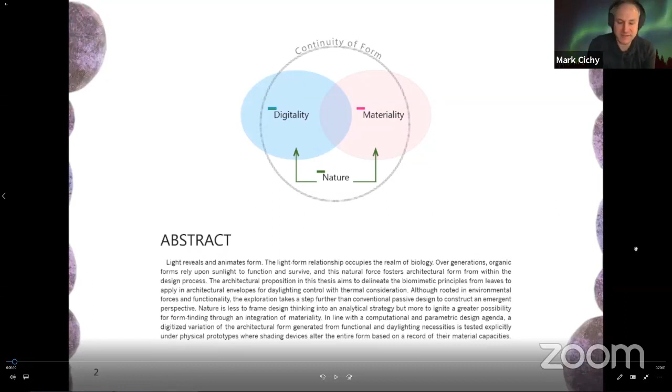Yeah, so we have David Correa, Mark Cichy, which I've not met, so hi. And so I just want to start by welcoming all of you and giving up your time. And I'm representing Marco in the department, but he's here, so he can say hi to the rest of you. We have two guests. I do not know Mark at all, so I'm really sorry. If you do not mind introducing yourself to the rest of the world. I'm sure we have a global audience spanning time zones. Sure. Mark Cichy from HOK Architects here in Toronto. I'm the global director of design technology. Excellent, thank you.

And David, I believe you are a Ryerson graduate. Yes, I am. And you, I believe, are teaching at Carleton University? No, I teach at Waterloo. So Waterloo, nearby, sorry. Yes. And I have a small office in LL Lab in Shanghai. Okay. When it's outside of Ryerson, it's the rest of the world, so it might as well be Timbuktu. Anyway, do you care introducing yourself? Myself, yeah. I went to Ryerson, had a fantastic time, great instructors, and I kind of started traveling the world. I studied in Calgary, the Yukon territories, and then in Germany for over 5 years. My expertise is in robotic fabrication and advanced materials, looking at shape-changing materials and complex composites. And now I'm teaching at Waterloo, leading the advanced fabrication and robotics area of research.

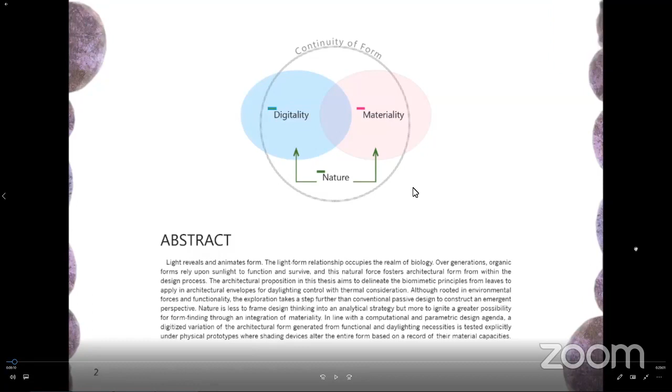Okay, you can go. Light reveals and animates form. The light-form relationship occupied the realm of biology. Over generations, organic forms rely upon sunlight to function and survive. And this natural force fosters architectural form within the design process. The architectural proposition in this thesis aims to delineate the biomimetic principle from leaves to apply to architectural envelopes for daylighting control with thermal consideration. Although rooted in environmental forces and functionality, the exploration takes a step further than conventional passive design to construct an emergent perspective,

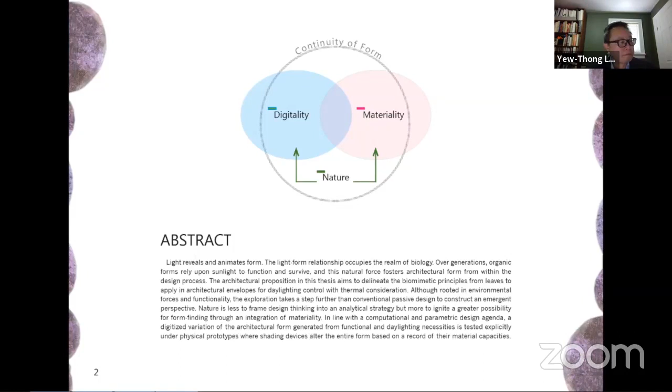a return to functionality. In the chaotic world of matter and energy, architectural form evolves actively and autonomously through forces in their elemental composition. Fundamentally, the forces or the information hidden behind the form variation originate from the functionality that it carries. This sheds light upon biomimetic design, where the organic form alters and adapts based on the functional inquiries towards survival and evolutionary essence. On Gottfried Semper's proposition about the mathematical function of architecture, forces request the change of forms. Every work of art is a result, or using a mathematical term, it is a function of an indefinite number of quantities or powers, which are the variable coefficients of the embodiment of it.

Forces in the architectural form were once equated to the iatromechanical system, coined by Descartes, which accommodates a series of discrete parts functioning as organs and bodily systems according to purely mechanical principles. The problem is the form invented from the predetermined expectation and misapprehension of natural forces will eventually direct architecture to utilitarian machinery.

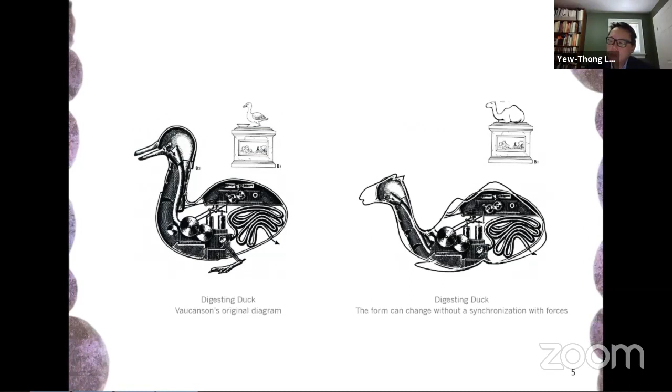Nature suggests a feedback loop in which the variation of form requests the change of its original function, resulting in a new form of function, a multifunctionality. This dialectical relationship opened a discussion toward nature where architects have found a brilliant recipe to apply in form-finding design.

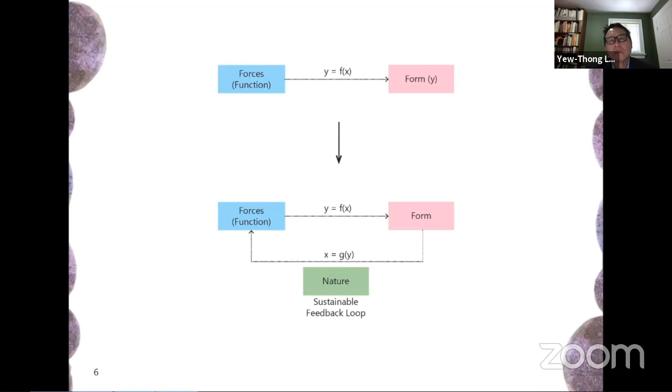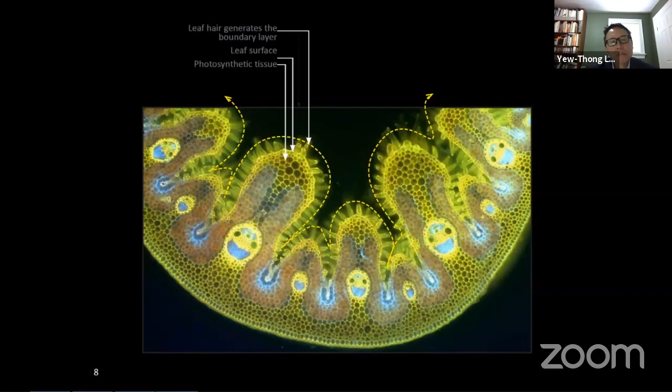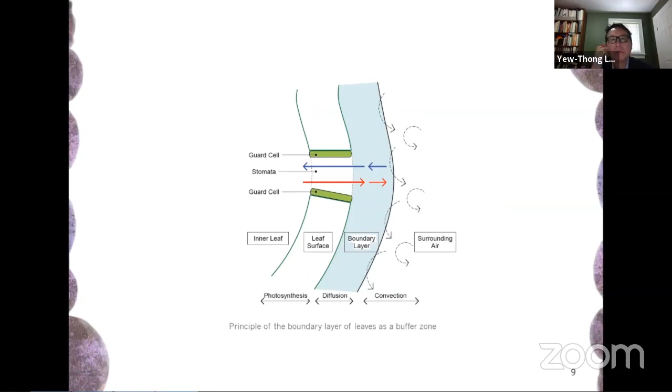Biomimetic buffer zone. Leaves are one of the most vulnerable organs of plants, with soft tissue, thin membranes, and an external location to handle photosynthesis. The leaf epidermis contains a buffer zone located just at the external boundary of the stomata layer. The boundary layer is a thin zone of calm air that surrounds each leaf. The thickness of the boundary layer influences how quickly gases and energy are exchanged between the leaf and the surrounding air.

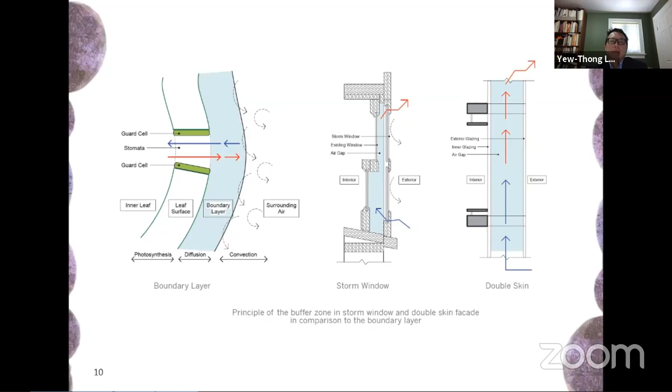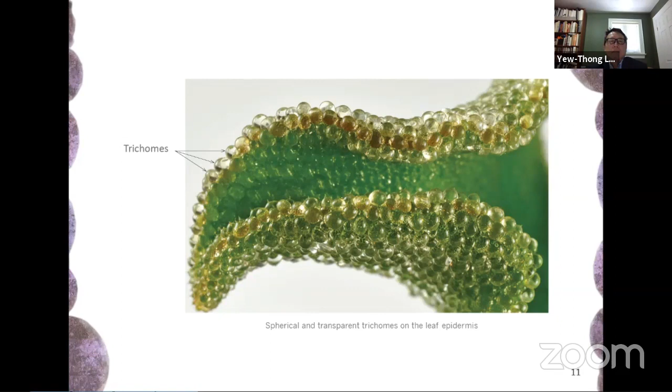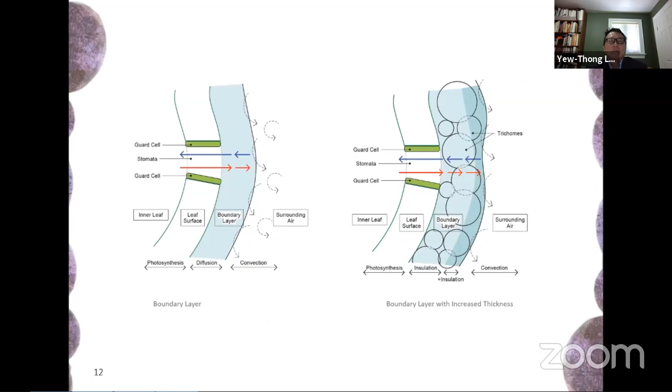Plants adjust their boundary layer thickness around leaves through the development and configuration of hair, or pubescence. The hairs, so-called trichomes, usually take spherical shapes with transparent material to form minuscule bubbles. This feature allows trichomes to maximize their air buffer zone without blocking the necessary amount of sunlight entering the photosynthetic cells beneath.

The field of architecture has stated the biomimetic functionality of air for centuries under theoretical and technical circumstances, to fully understand and transcend the application of air in pneumatic designs. At a higher level of organic development or evolution, air is no longer a basic chemical supply, but rather an integrated force.

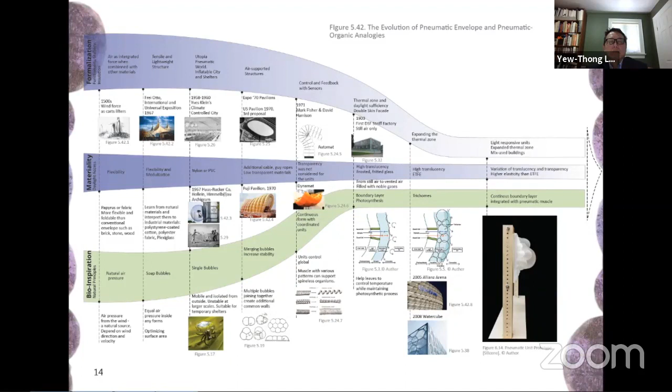In 1961, Frei Otto started to conduct experiments with soap bubbles, which can merge, keep the least enclosed surface as a cluster, and automatically construct a flat common wall between every two members. Organic cells and body parts make use of the principle to increasingly construct series of units to support each other. A single and large individual of any pneumatic form is very fragile and unstable under external pressure and easily ends up with undesirable deformations.

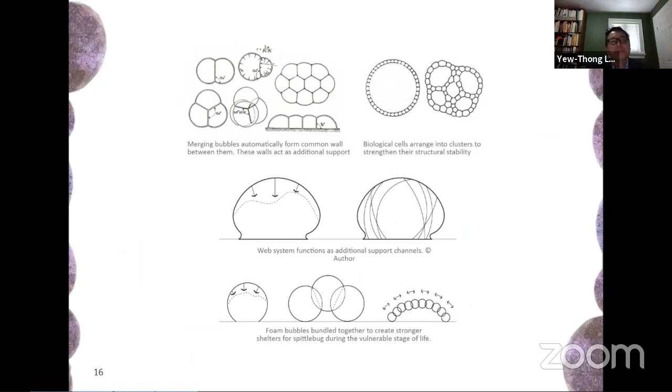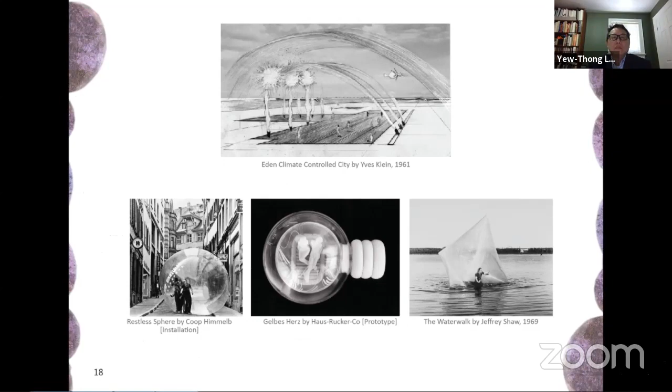However, in 1968, a group of utopian artists, theorists, and architecture students glorified air in a single unit as a magical source to construct inflated habitats for humans. In terms of material use, they were successful at containing air inside a highly transparent skin made of nylon or PVC. When functioning in buildings of a larger scale, the failure of the single pneumatic form was disclosed in the first two design options of the U.S. Pavilion for Expo 70 in Osaka in 1968.

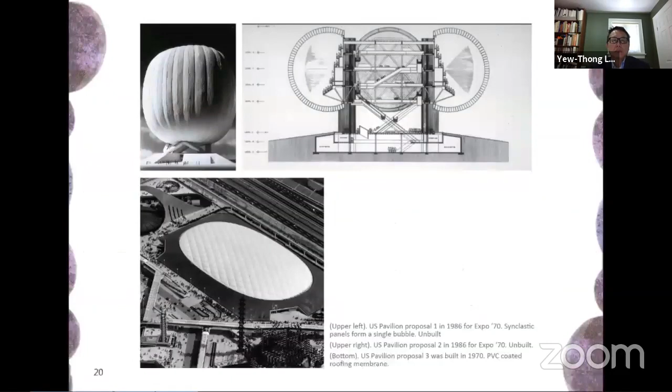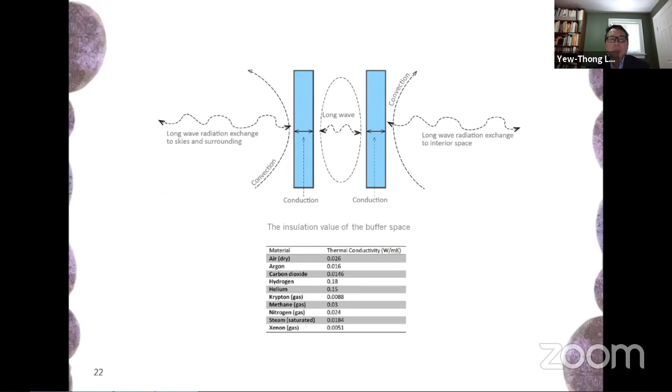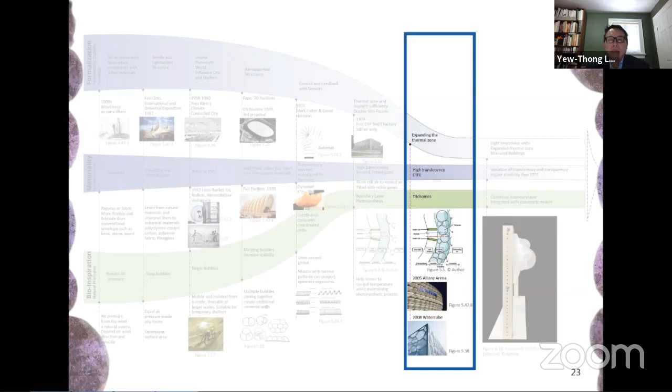Unlike massive exhibition pavilions and temporary installations, the air cavity was first used in 1903 as an insulated layer to reduce heat gain in summer and heat loss in winter for basic office space, thanks to the low thermal conductivity of air. Inspired by the more stable structural geometry of soap bubbles and the expansion of the boundary layer on leaves, the ETFE pneumatic facade became a catalyst for liberating the rigid form of the conventional double-skin facade.

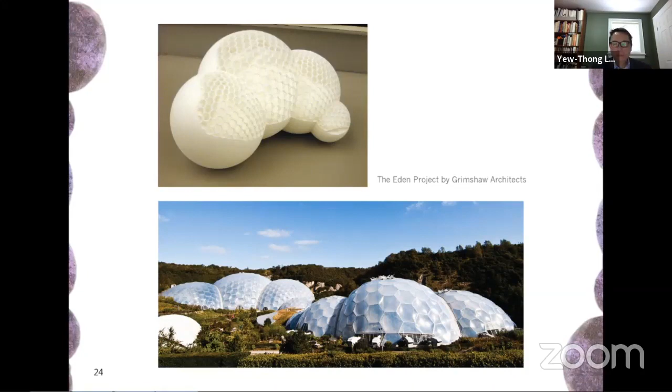The first ETFE building was the Eden Project, designed by Grimshaw Architects in 2000. After the Eden Project, many descendants of the ETFE system have been spawned over the course of 20 years as a default immediate solution for daylighting forms. However, these types of envelopes enclose merely a massive space for sport activities or exhibitions, where daylight variations are not as critical as in deep-space offices and mixed-use buildings with multiple stories.

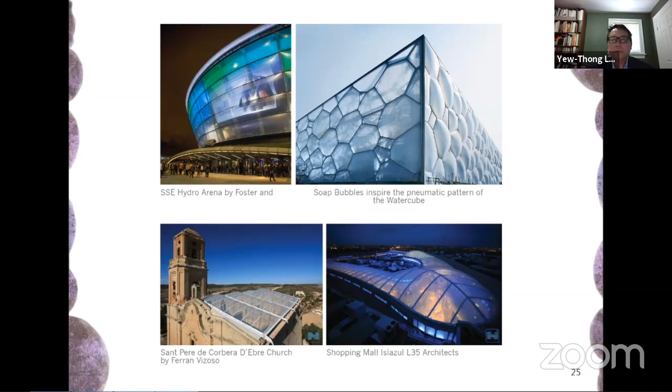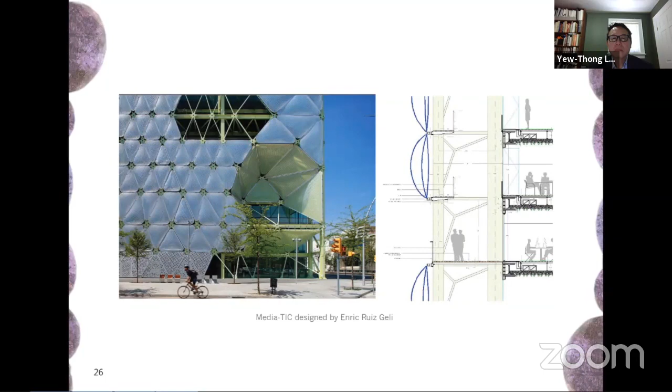In 2010, by adding more pneumatic chambers in a unit, ETFE panels in a multi-story building named Media TIC, designed by Enric Ruiz Geli, can vary their transparency across the facade area to adjust daylight access, opening a new paradigm in responsive pneumatic envelopes for daylighting design. Investigating contemporary building facades from a biomimetic point of view, the thesis attempts to integrate higher performance traits of functionality, materiality, and stability in a new multifunctional pneumatic envelope.

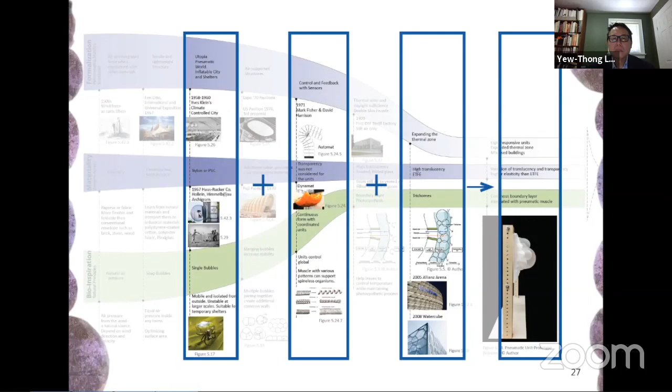Material capacities. Unlike properties, which are finite with time and space and strictly defined in measurement, a material capacity is always subtle, potential, and relational, expressing its hybrid performance with patterns of material distribution, coming closer to the responsiveness and flexibility of biological tissue. The material selected for fabricating pneumatic daylighting components must emulate similar properties to those from nature. In Oxman's article on variable property design, she claimed that designers can dynamically mix and vary the ratio of different materials in order to produce a continuous gradient.

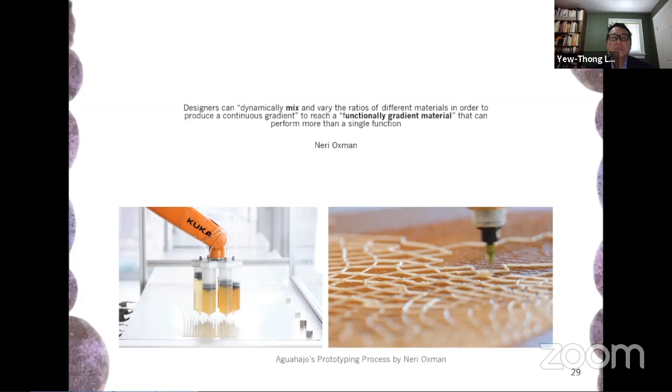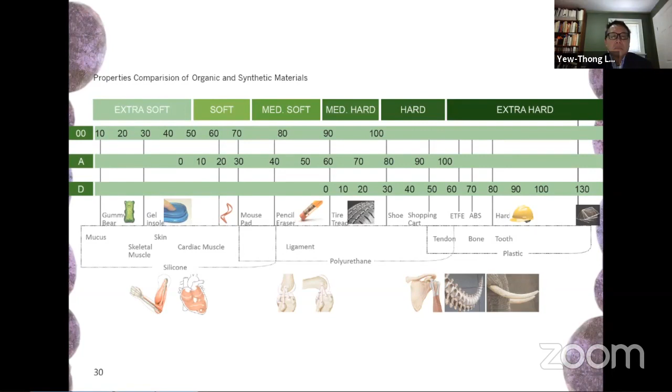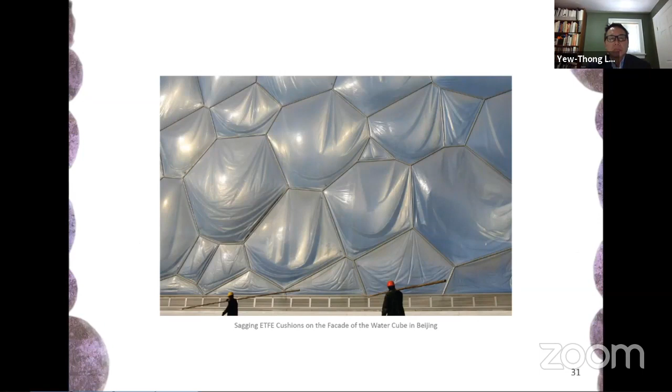Also, thanks to the liquid base, silicone rubber can occupy and copy almost every micro detail of a mold, which can be measured and digitally produced in advance via 3D printing. ETFE's lower elasticity confines the pneumatic unit to a fixed frame, and it cannot vary unless there is a change in the grid pattern. As silicone is softer, it can return to its normal state after deflation. Softness and body compliance are significant features normally apparent in biological systems, which contribute to a more natural interaction with their environment.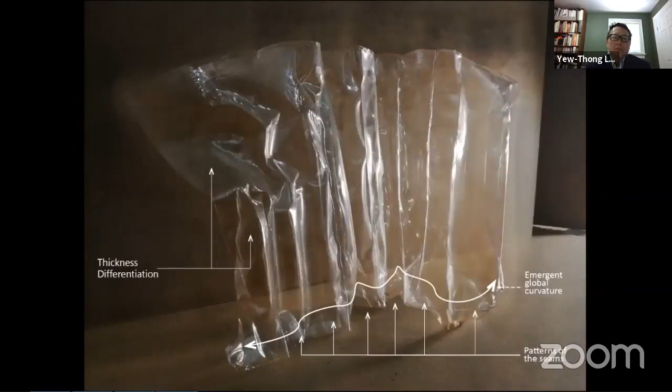The experiment with plastic sheets showcased an emergent curvature resulting from a variation of pneumatic patterns. However, by differentiating thickness and merging more than one hardness value in the casting process, a silicone panel can expand dynamically under the same intake of air pressure with the same surface pattern.

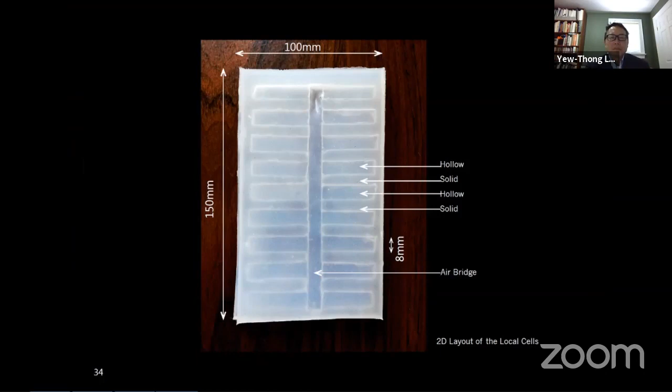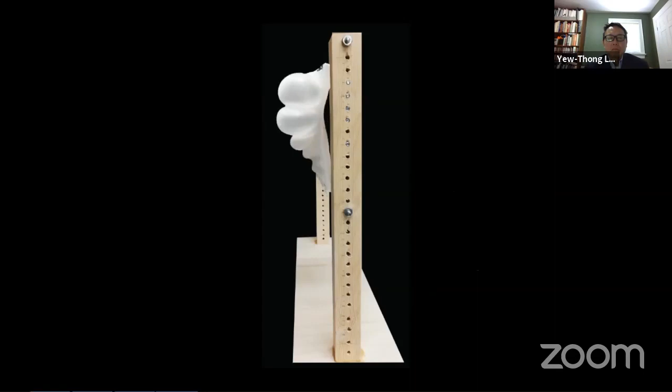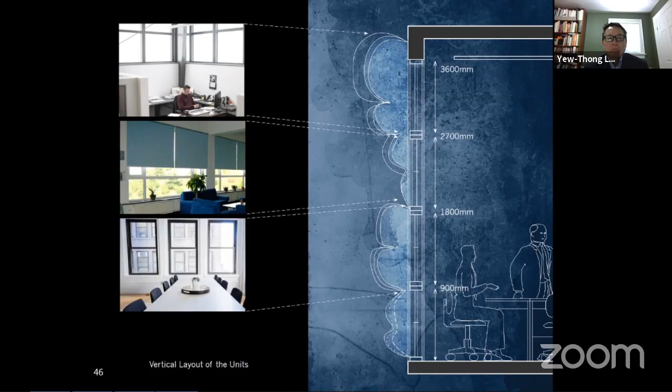On a vertical distribution, pneumatic panels unify daylighting components on an envelope, including shading devices, blinds, and windows. On a horizontal distribution, this prototype investigates the inflation level of the cells that can adjust daylight based on the sun orientation and floor plan layout.

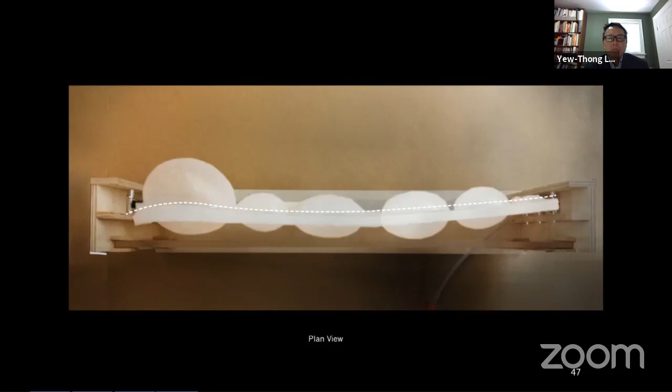To apply and validate the materiality in association with digital modeling, the design project in this thesis proposes a pneumatic facade that can control daylight and mitigate visual discomfort for a deep floor plan office building. The project is positioned in the city of Toronto, where the high living density and expense lead to packed and shadowed lots, challenging any new construction of productive working spaces.

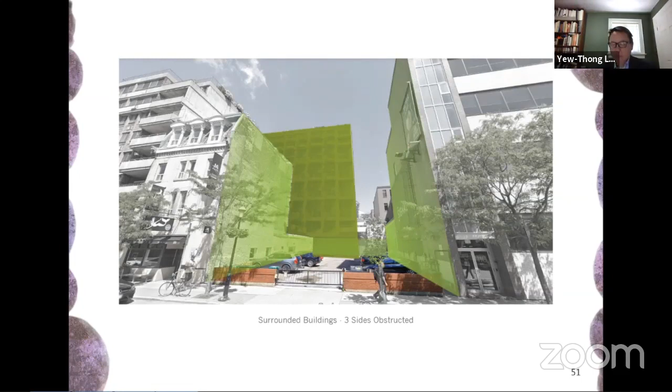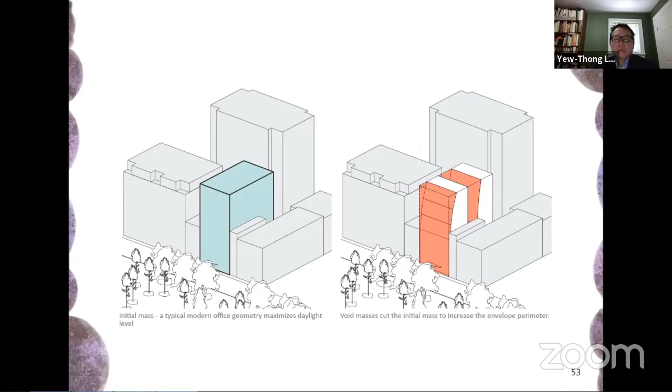The chosen site has a typical site size and only one front side that allows direct daylight access to the open area of St. James Park in the south. From a single mass, a void fillets the front to get more daylight from the south direction, and another void divides the mass into 2 parts, forming an atrium at the core. The boundary of the least daylit area drives the profile of the void that creates the atrium. The cutting profile has to be mirrored to offset the lack of daylight level therein.

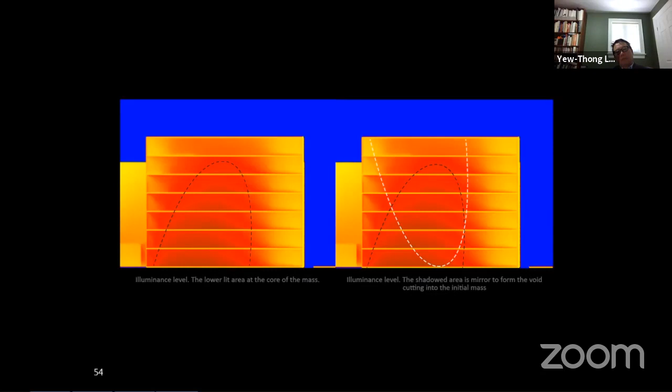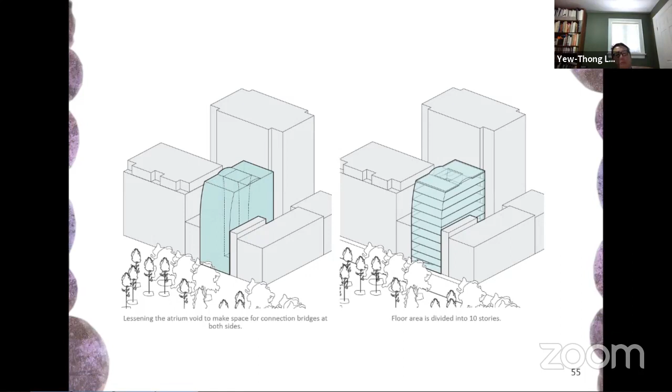During the massing process, floor area is also managed based on the other economic factors. The building model emphasizes more on the envelope for a contemporary open layout office. They seek to define a process of assessment and analysis from which to derive an aware and targeted project to get the most out of the luminous performance in interiors, aiming to achieve a threshold value of comfort.

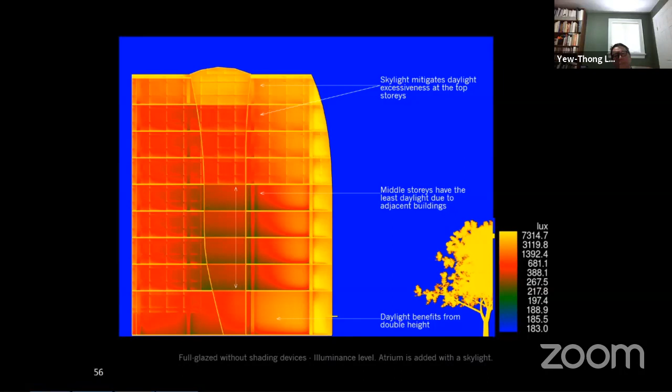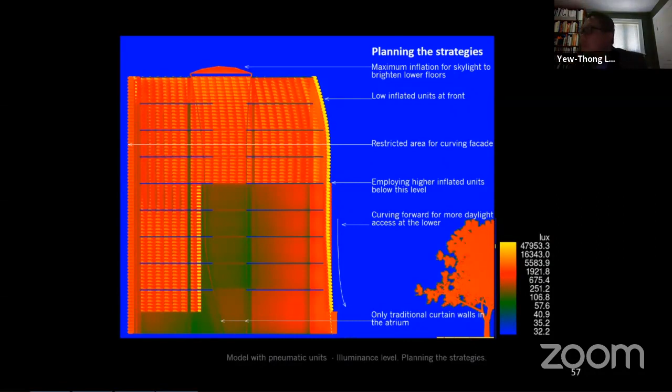There are 2 models for the illuminance analysis. The first one with fully glazed envelopes suffers from excessive sunlight on the top floor, while the atrium space above the ground level faces the problem of lack of daylight. In Model 2, a uniform pneumatic system afloat on the conventional curtain wall can diffuse the light excessiveness. However, directing daylight further to the core relies on the inflation level of each pneumatic panel in the system.

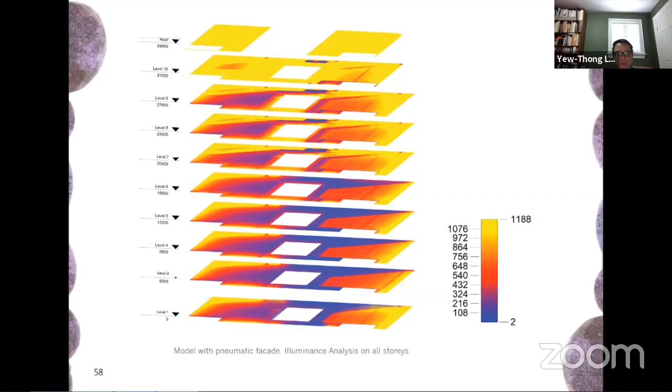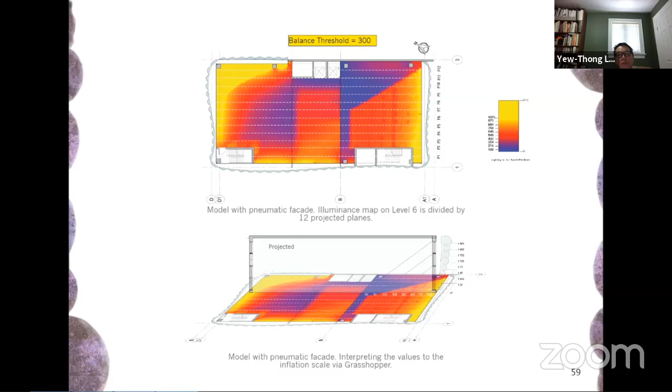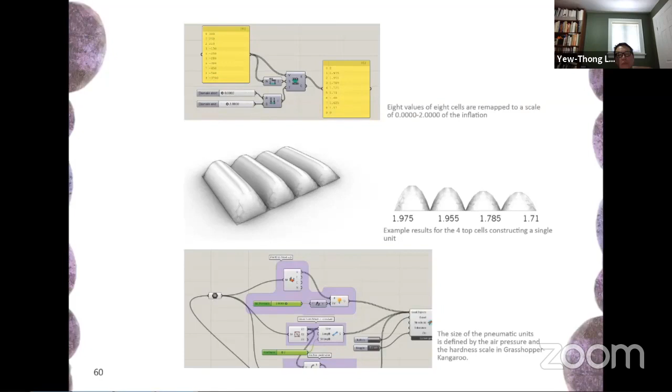The inflating dynamics of all local panels relate proportionally to the illuminance evaluation on each floor plan where the panels are installed. The illuminance map on each level is subdivided into 12 projected planes to interpret its numerical scale into the vertical distribution of pneumatic cells, with a balance threshold setting of 300 lux. By setting the variation of hardness, mimicking different types of silicone rubber, the numerical values of illuminance are remapped into the inflation factor in Grasshopper.

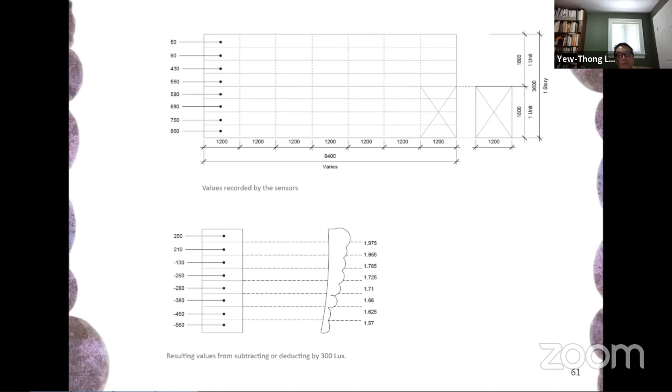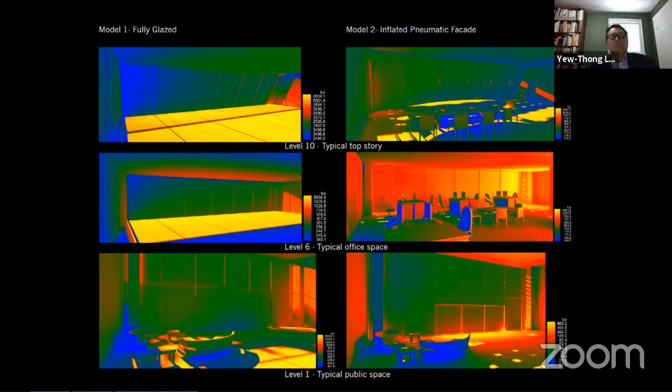The overall dimension and locality of the unit agree to the same grid-based metric, according to the commercial and industrial availability of the curtain wall panel of 4 feet by 6 feet, or 1200 mm by 1800 mm, which will be potentially convenient for the fabrication of pneumatic components in reality. In comparison to the fully glazed model, the daylight distribution in the pneumatic model is more even, maintaining comfort and productivity for the occupants.

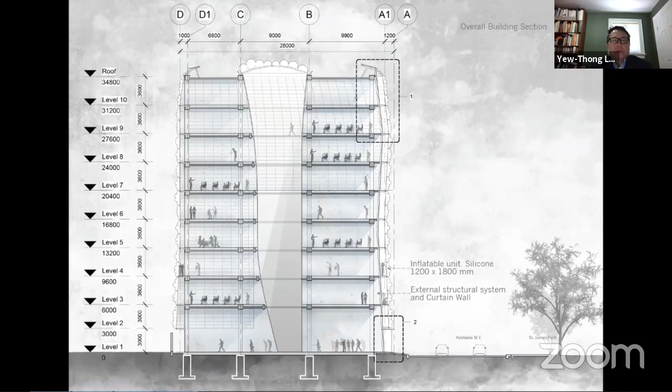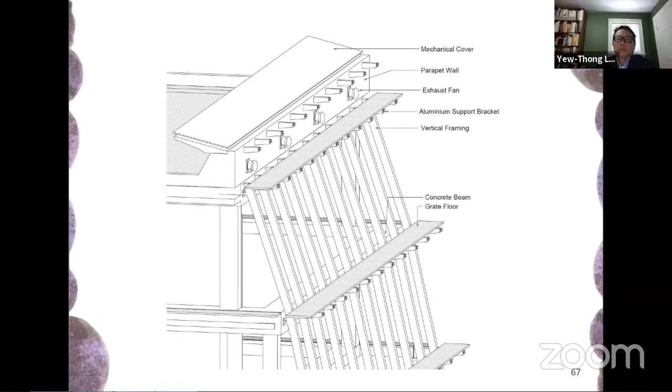Construction feasibility. The section displays the array of pneumatic panels on the south and north sides of the building. Overall, one story can hold 2 rows of pneumatic panels. When the instantaneous presence of light has been caught, it can be controlled and fixed through the self-shading and self-regulating scheme. Additional vertical framing support helps anchor the horizontal elements, including brackets, floor grate, and the curtain wall, instead of merely a maintenance shaft. The balcony opens accessibility to users. This requires an alignment of interior and grate floor level.

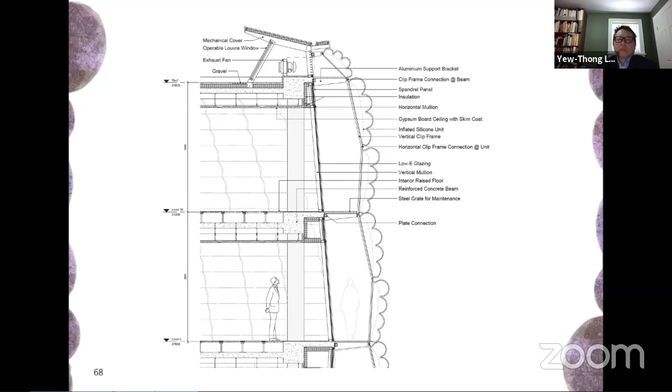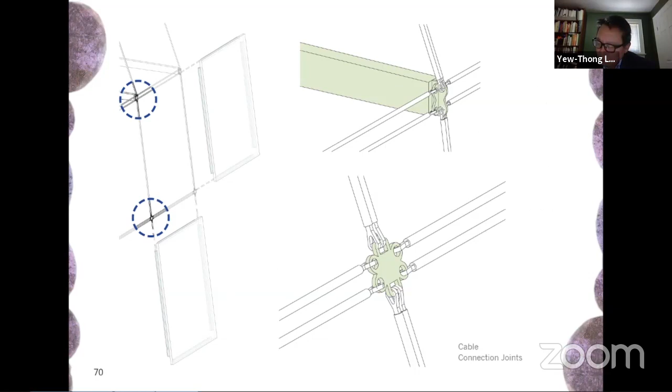Finding an optimal level of light simply through the achievement of a threshold level established a priori is not the ultimate goal of the thesis. Rather, the thesis design research has questioned and tested a possible convergence where biomimetic design, digitality, and materiality are exercised to arrive at a hybrid and emergent form of the building envelope that speaks for the 3 domains. The design method in this thesis seeks to find application not only in new construction, where the technological component can be easily integrated with the building envelope, but also in existing edifices in the case of energy retrofit and environmental concerns.

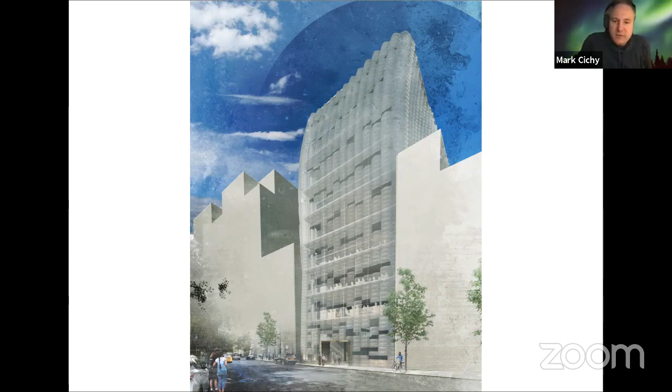Okay, are there any other questions? Maybe from Mark, perhaps? Yeah, so I've actually done a significant number of this kind of building type, unfortunately, in my career. And I would say that there's two perspectives of this. And actually, I guess the question is, which one are you addressing at the end of the day? There's, I would say, the old model or the less creative model, that you give a shell to somebody and the space within it is then customized and defined based on that shell.

But I work on a lot of these projects now, and the way that things are actually working now and changing, I would argue for the better, is that the design is actually more inside out, meaning it's the program that drives what happens on the exterior. And I wonder, in a situation like that, there's a two-part question. One is, do you see what you've done here as being solely applicable to this building type? That's number one.

And the second part is, how does it acknowledge the fact that the building is more than just a shell and is driven mostly by the internal use? Because from what I see in this particular instance, this is largely a facade study, not so much how the concepts you're developing on the facade work themselves into the internal guts of the thing. So those are a two-part question, I guess.

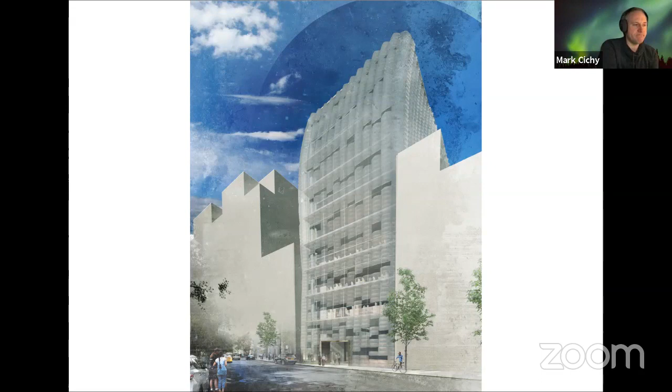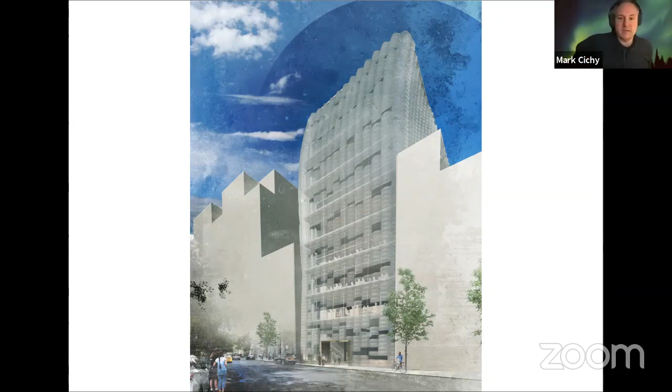And I thought that it was an excellent opportunity for you to use it, or leverage it, as a starting out point in whatever scripts or content you had further down the line to illustrate, here is the relationship between these things and how I've developed my own taxonomy. So having your own taxonometric, again, another word that doesn't exist, diagram that exposes the research you've done and what you've developed. Sorry, that's my last comment.

So Ngan, this is more of a comment, and one thing about Zoom is that we can zoom in, pardon the pun, on body language. So I can see David about to jump into something. So I'm just gonna have him hold back a little bit and let Ngan respond to Mark's comment.

Did you discover what Mark discovered when you were doing those taxonomic studies? Yes or no, simple as that. If you actually pursued it, or you just felt that it would not really benefit you. This is more for Mark's benefit. And then I'm going to let David jump in.

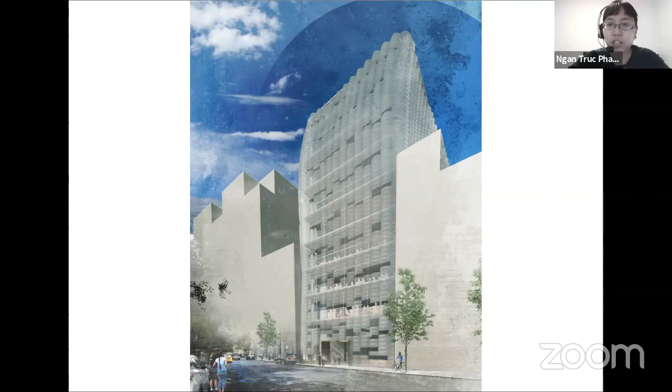I put a lot of my experiment into the parameters throughout the development of the pneumatic evolution diagram that I made, connecting pneumatics and biology together. It's not just dwelling on the biological theory, because it was quite challenging for me to read through academic articles about biology. So I tried to find the conversion and similarity between architectural pneumatic facade and biology.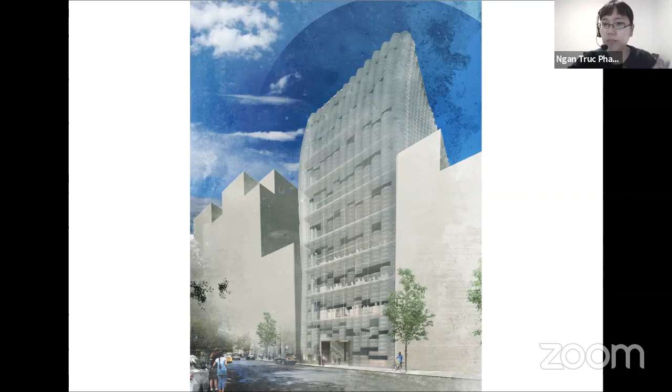Okay, so the response is somewhat yes, and you've taken it to a parametric study. I'll let Mark respond to it a little bit later, but I think David actually had a point of interjection in the middle of one of your other clarifications.

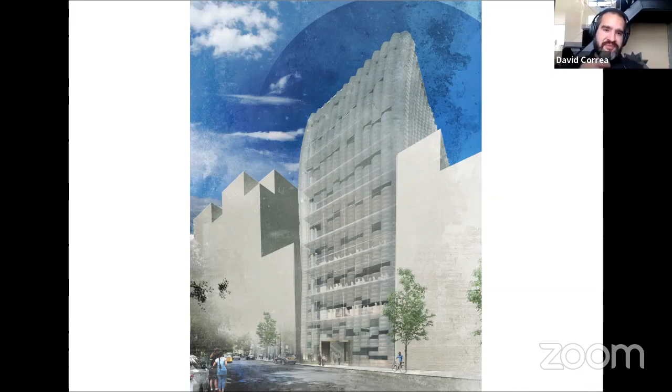I'm going to let David ask some questions, and then maybe we can sew these two together. Ngan, let me see if I understand what you did. So you looked at those outer layers of the leaves, the sort of spherical elements and small microturbulence, and the increased surface area around them as a way to, well, that air film around them, to increase the insulation value. Is that correct?

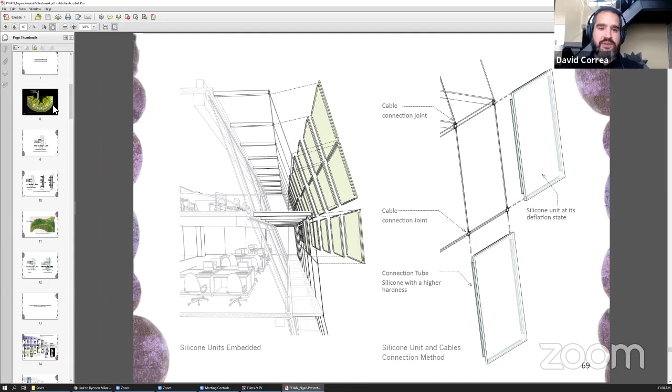This is then an expansion of the thermal corridor of the cells, so that dissipates some of the heat, correct? And depending on how those cells expand and contract, there's more or less adaptation, depending on the type of climate, they're actually able to adapt to those changes, correct?

Okay, so then you abstracted that and turned it mechanically into these inflatable bladders that will do a very similar sort of shape transformation. Yes? Okay. Now, the part I'm a bit confused about is that you're then correlating that not only to heat gain, but to light transmission.

Is that correct, or is it still more or less about heat dissipation around the surface? It's more about the daylighting, because I tried to vary the transparency of the material.

So this biological principle needed to be validated by the silicone and materialization process that I made in the prototype. The prototype is trying to look at whether the material can have the elastic behavior and variability you're looking for, by instrumentalizing those channels, which you can use to give a gradient of change, correct?

Okay, so the part about the lighting transmission, how did you validate that the depth of the bladder also affected the light transmission? How did you validate that aspect?

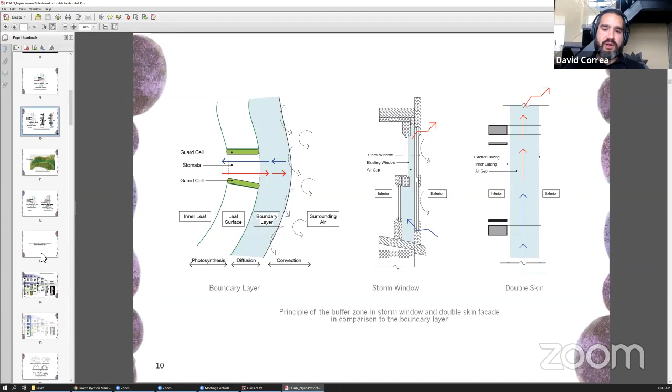Sorry Mark, you said something? Oh, I was just going to say, is that because the membrane becomes thinner and therefore it transmits more light? That's the idea, right?

Yeah, my exterior facade has an arrangement of 8 bubbles, and each 2 bubbles will represent a shading device. For example, on this slide, the very top 2 bubbles represent the high window that can let light access very deep into the floor plane.

Okay, this is very fast. So there's actually a contradiction then in the images you showed, where there's windows where the membrane is flat. Then actually I wouldn't be able to see much through there because there would be less light going through it. Wouldn't that be correct?

Yeah, okay, so at the position of glare and discomfort for the user, the bubble will be very flat and become more opaque. Okay, so what you're saying is every time it inflates there's more light, and every time there's less inflation, at all points you're still seeing through this membrane. That's the other part of it.

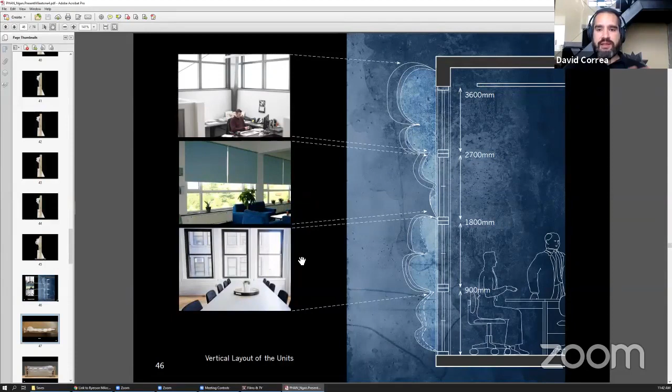Okay, I don't think I have to think about this a little bit because it's a bit of, I mean the only question I have, I guess, in terms of formal, is that it seems you analyzed geometries that were fairly complex in how they worked - these bubbles that were associated with each other - and then you translated them into very longitudinal elements. So it seemed like an odd parity of the two. Would you expand on what that parity came about from?

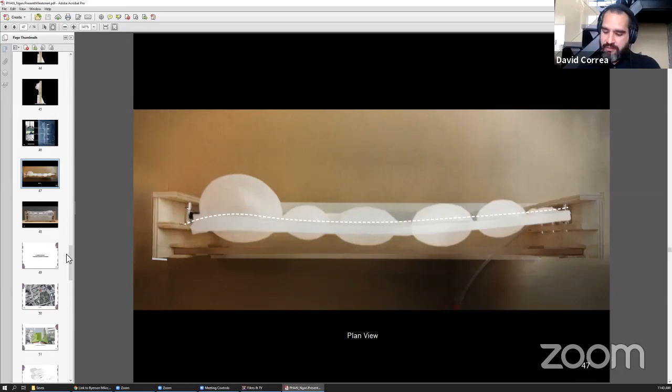I mean the last question I have - wouldn't it make sense if we had the same geometry without inflating it, but static, and it has the same sort of configuration? What would be the loss?

Can you repeat it? So if we had the same outer geometry of the bubbles, of the outer shell, and it has the same gradient, but it's customized to have some light coming in some areas and less light in others, what would be the difference to having them with the capacity to actuate? What would be the main loss, what are we losing? So you mean the downside of it?

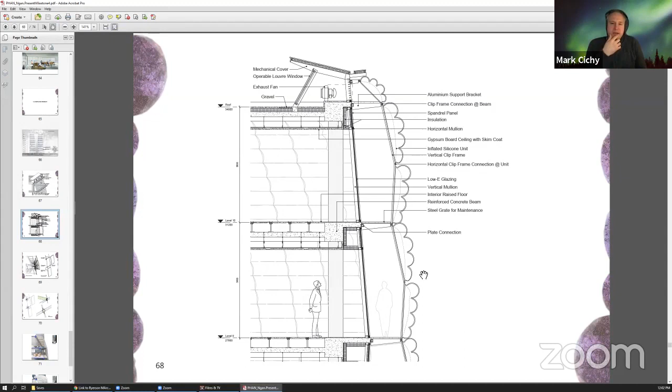I think I just want to add to that, Vince. I just want to say that I think, as architects, we should be obsessive about what the experiential quality of the space is like. It's one thing to be measured on something and say, statistically, here's the science that supports what I'm saying. But it's another thing to say, what does this thing feel like? How does it make you feel when you're inside it?

What is the difference between 2 layers of pillows, or no pillows, and 1 layer or 2 layers of tight strung in tension plastic? These are the things that I think, we use renderings to convey that, we use VR and all kinds of different technologies to evoke the feeling of space. I think that's one of the elements that may be missing from this, what is it like when you start layering these things? What does that feel like inside the space? Not what is the science behind it, that's obviously very, very important because that's the validation factor. But the part that's missing for me in this is the feeling, the design aspect. What if the science says this? What does that look like?

That's for me, sorry. Yeah, I would agree, and that's something that I have noted, and Ngan, we have talked about that, so we know that's something that's going to have to be popped in and really clarified in your final submission.

Well, I'll chime in regards to your comments, Vince. The presentation is, in my opinion, much better than your document, Ngan. I think your presentation is more clear as to what your intent is. It has a more cohesive line of thought, and I had an easier time engaging with the material. The document shows that you were really excited about this. I think your material experimentations are quite compelling, and I could think that could have been even a larger part of your work, which I understand wasn't possible.

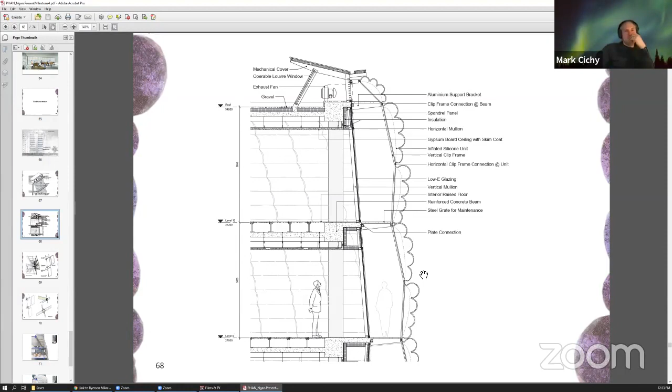Wow, Mark, David, man, that is a very positive spin on this project. So thanks, kids. Okay.

I think we are coming back full circle, dwelling on some of the very similar points that we've raised. So I want you to have the last word, Ngan, before we wrap this up. Are there any other high-level comments that you want to make in response to the 2 or 3 really key points that we brought forward today, thanks to having Mark and David coming in as guest critics and stirring up the dynamics a little bit differently from the 3 of us, since sometimes we keep on punching at the same things? So are there any high-level responses that you might have? If you don't, that's okay. Vince can take that forward with you.

It's up to you. So my facade is focused more on the pattern of the unit. Each unit has its own pattern that can be varied. But compared to ETFE and other daylighting buildings, this is more flexible because I can just 3D print the mold for casting the silicone unit, and it can be a process that is prefabricated and for mass making, and this has more opportunities than ETFE because they have a frame and they are very rigid compared to the mass making of the silicone. So that's what I focus on for the materialization. Okay, thank you.